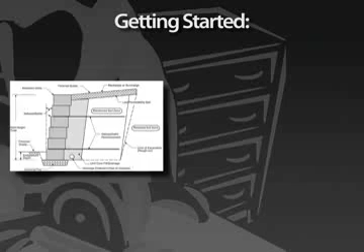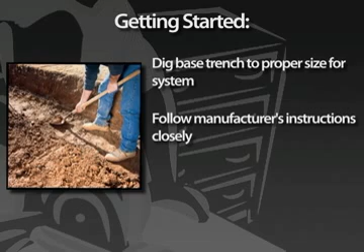Remove all surface vegetation and debris. This material cannot be used as backfill. Dig the base trench to the designed width and depth of your block system. Retaining wall systems differ greatly in block size and design, so follow the manufacturer's installation instructions to the letter. Then, level the excavated base pad, starting at its lowest point.

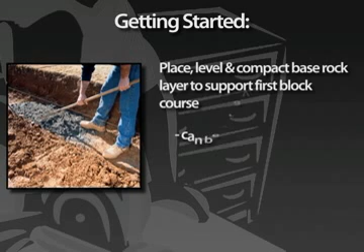Next, place, level, and compact a layer of base rock to support the first course of block. The base rock can be gravel, road base, or crushed rock, 1/4 to 3/4 of an inch in diameter. Typical base fill is about 6 inches deep. This allows the wall to flex slightly with the ground movement. Tamp this down with a hand tamper. If building a long wall, you may opt for a motorized walk-behind compactor available at most equipment rental outlets.

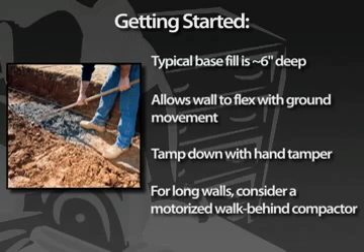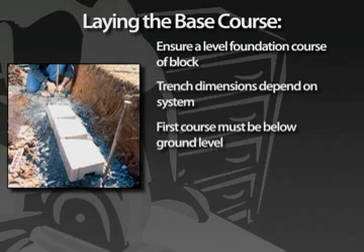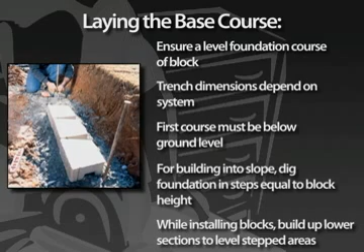The key to a successful retaining wall is ensuring a level foundation course of block. The dimensions of the trench will depend on your system, but the first course of block must be below ground level so the surrounding soil will secure it in place. If you're building into a slope, you may have to dig the foundation in a series of steps equal to the height of the blocks. Then, as you install the blocks, build up the lower sections until the stepped areas are level.

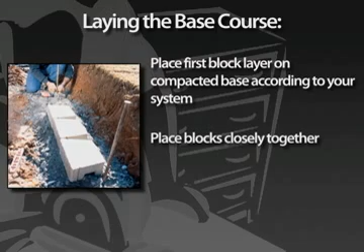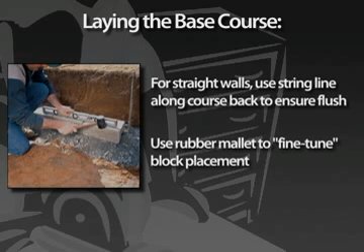Starting at the lowest point of the trench, place the first layer of blocks on top of the compacted base, according to your system's design and instructions. For example, some blocks may feature a front lip that must face up and forward. Place the blocks closely together, checking the level and alignment of each block. For straight walls, use a string line along the back of the course to ensure that the blocks are flush. Use a rubber mallet to fine-tune or tap the blocks into place.

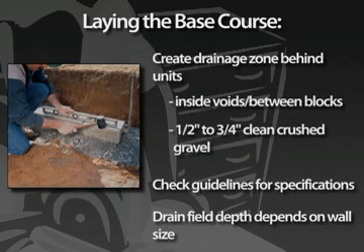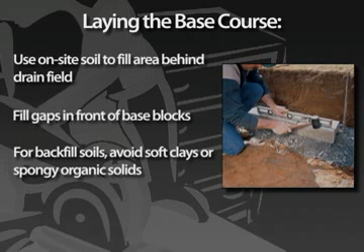After the base course is level and in place, create a drainage zone behind the units, inside all the voids between the blocks, using 1/2 to 3/4 inch clean crushed gravel. Again, check the manufacturer's guidelines regarding drainage specifications. Some blocks feature rear voids to accept rock to create the drain field. The depth of the drain field will also depend on the size of the intended wall. Then use on-site soil to fill the area behind the drain field. Also fill in the gaps in front of the base blocks. For backfill soils, avoid using soft clays or spongy organic soils, which won't properly compact and will settle after construction.

Use a compactor or tamper to compact the wall, the drain field, and the area directly behind the drain field. Make the first compaction pass directly over the wall. Then compact parallel to the wall, continuing the process until the soil no longer settles. When finished, sweep off any pebbles or debris so the next course of blocks will rest evenly on the base course.

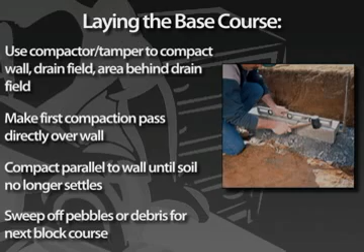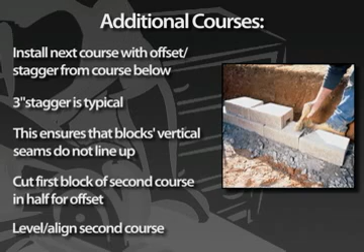Install the next course of blocks with an offset or stagger from the course below. A 3-inch stagger is typical in many systems. This should ensure that the blocks' vertical seams do not directly line up, adding structural integrity to the wall. You may need to cut the first block of the second course in half to achieve the necessary offset. Level and align this course, adjusting where necessary. Again, fill the drain field with drainage rock and use on-site soil to fill the area behind the drain zone. Compact the wall, drain field, and backfill as with the first course.

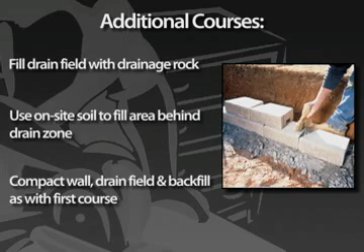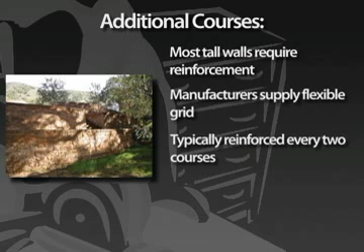Before laying the third course, most tall walls will require reinforcement. Manufacturers often supply a flexible reinforcement grid with the system. A typical wall is reinforced every 2 courses. After sweeping the surface of the course, roll out the grid behind the wall with the edge of the grid against the front edge, or lip, of the block. Place the third course on top of the grid, pull the grid tight to remove any slack, and shake the grid into place. Repeat this process, installing additional courses, adding drainage rock and backfill, and compacting appropriately until you've reached the desired height of the wall.

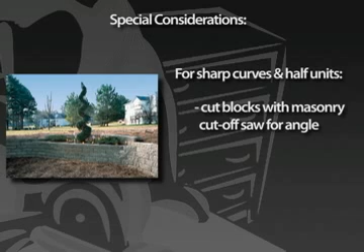Sharp curves and half units may require cutting the blocks with a masonry cutoff saw to achieve the appropriate angle to form the curve. Cutoff saws are usually available at most equipment rental outlets. When placing the reinforcement grid along curved walls, the grid should follow the back of the block. Slit the grid with a utility knife and either feather it outward or overlap its edges to follow the curve.

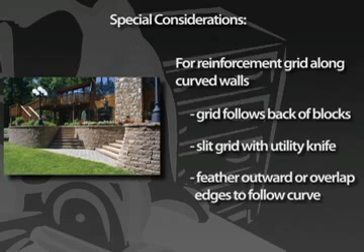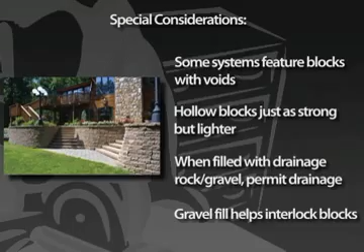Several systems feature blocks with voids. These hollow blocks are just as strong as the solid blocks, but lighter for easier installation. When the voids are filled with drainage rock or gravel, the rock permits water to drain to prevent hydrostatic loads. At the same time, the gravel fill actually helps interlock the blocks. Optional capstones can also be installed along the top course to give the wall a neat finished look. Remember your leather gloves.